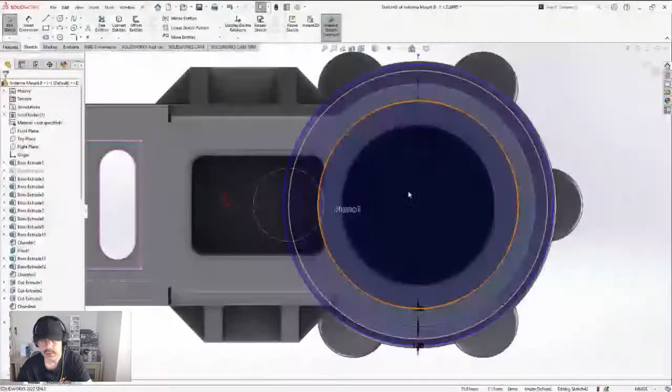Hey folks, getting set up here. It's been a long time since I've done a stream, so it's like going back to school for the first time, relearning everything.

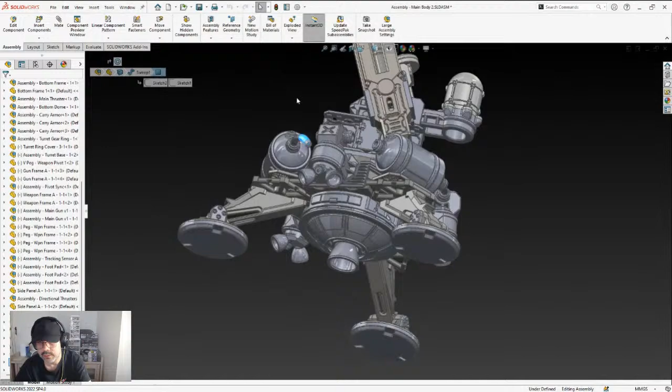The idea is this will be deployed from something like the VSS, my VSS in particular, the Space One, or some other craft, or it could be some sort of alien thing or whatever. The thing is that it gets deployed and lands on the surface.

So it has thrusters for maneuvering. I'm not sure what some of this equipment is, it's just that things look better with it. So some of this equipment is for balance, maybe this is fuel or some sort of energy thing. I don't know, but anyway, there's a lot of aesthetics here.

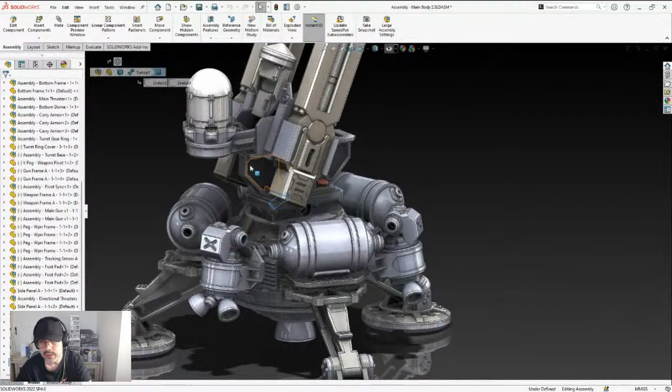A lot of it has practical aspects in the design, and instead of putting things inside, like fuel tanks or ammo drums, the idea was to put it outside. The reason is for logistics - if it's some sort of ammo drum, when the ammo is depleted it's going to need a new way to add more ammo. If it's some sort of energy cells, I don't know, might be just... anyway, I think I'm going off on a tangent there on a sci-fi thing.

So these cylinders, make it whatever you want. So anyway, this is the weapon that I'm currently working on. I did an alteration yesterday, I need to add it into this.

The idea is that it gets deployed as a sentinel, ideally with other similar weapons, perhaps other platforms with the same kind of weapon or different weapons, and they get linked to some sort of orbital satellite, with a special one used as a communications hub. So the idea is an entire system for planetary deployment.

You can deploy these things over asteroids or somewhere else. I still have to work on some other designs, purely satellite, where instead of the landing pads, I'm not sure what will be placed there for balance, but another weapon system could be placed on the bottom. So you have this turret that can fire 360 degrees in every direction using two turrets.

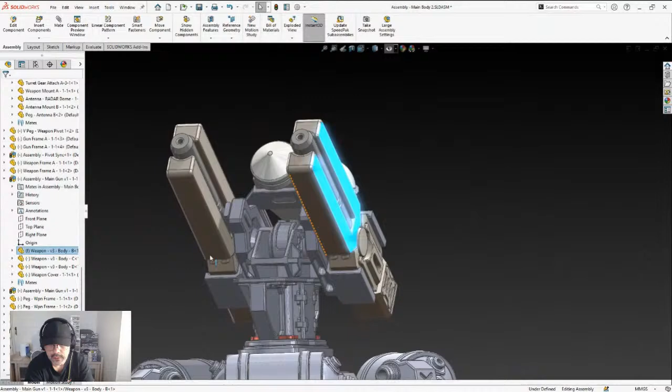I was thinking of printing a bunch of these while I'm here in Thailand. Then when I get back to the US in a few weeks, I could probably put those items that I printed and take with me, put them up on the store for immediate sale.

So what I'm doing here is looking at this area, trying to see if there's going to be a collision with anything there. I don't think so. I think it's got good enough clearance.

I did add a piece yesterday to here, I better add that in right now, mostly because I want to see how the thing is going to pivot and turn if there's not going to be any interference. Let me see.

Let me take a look at my files. Scrolling down, I'll take a look at comments a little while. I know there's people curious about Die Warriors, the current state of Die Warriors right now, and our future plans. So I do want to take some time to answer those things if people are curious.

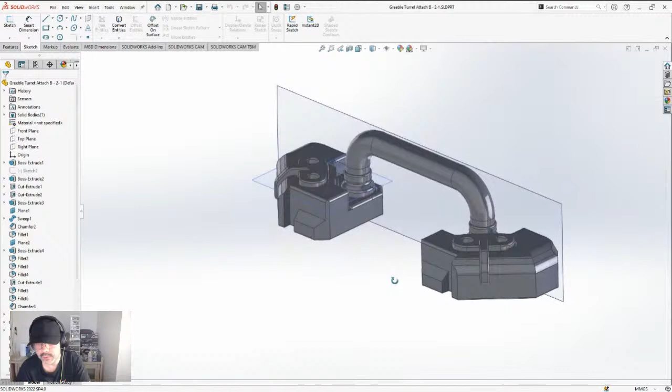So I'm using SolidWorks, and it's a fantastic CAD program, similar to Fusion 360 if you're familiar with that.

So I don't want to make anything right now. I want to insert this. I want to insert two of these, 1 and 2.

So sometime today in this condo, they have scheduled a fire alarm test. I don't know when that's going to be. So if there's some craziness that happens during the stream, you know why.

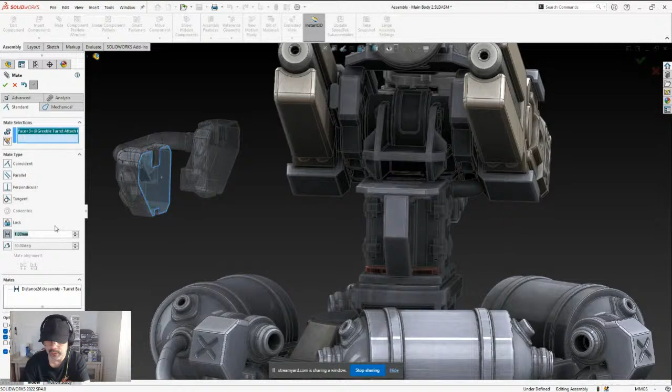If you're curious why I do that there, it's because I noticed with 3D prints there's always a type of shrinkage that goes on with the material. So I find that if I put a little separation between the pieces, they fit properly in the actual physical print. That's why I put a little distance with everything. That's what I'm doing here, so that's why it takes a little bit of time to show.

And here to here, 0.5. Yeah, that's it. So this side is done.

I may have to remove this bar right here, this pipe. When I designed it, I wasn't thinking about that, so that might present a problem. I have these ports for adding hoses and things like that, and maybe what I'll do is cover them up with a thin layer of plastic, and if I ever need to open them up, a small drill can just puncture that plastic and I can put a hose there. Might do something like that.

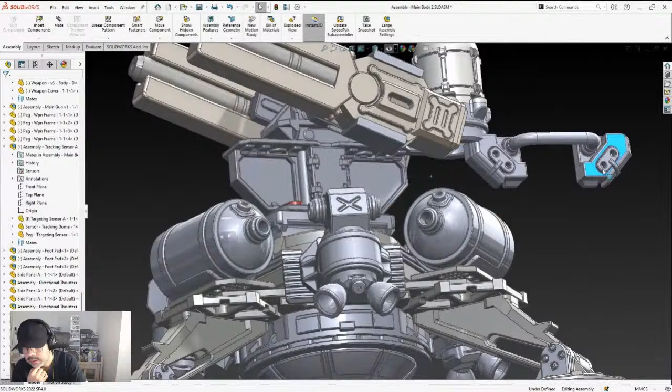I need to do the other one, the other side as well. So let's go down like that.

So right now it is Monday here in Thailand.

Okay, let's see, make sure it's down. Select that side and mate it to this side here at 0.25 distance.

So yeah, I'm preparing for a print. I got the printer currently printing a part right now, and I was going to have another part, actually the top part, this weapon area. I was working on printing that, but unfortunately...

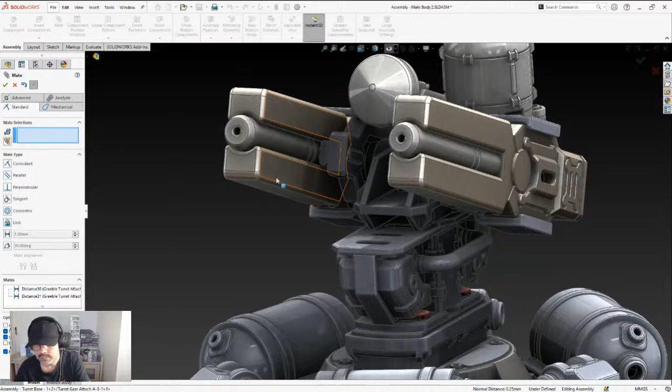I noticed that with this print, the prints are sticking extremely well to the printer, so when I pull the parts off, it's not coming off too easily. And I don't want to damage it. It's one of these flexible build plates, so I kind of bend it a little to flex it and push the things off. But I notice if the part is sticking too much and you're busy ripping it off the build plate, it could kink the build plate material, and then you have this little kink that's going to make a little rise in that area, and that's going to cause problems down the line. So I'm trying to preserve the build plate by having the thing easily come off, and one way to do that is not to have as much surface contact from the part on the build plate.

So what I'm doing right now is this area. This is what I'm going to be printing. This is an assembly, so I'm printing this as a separate part. I'll just go through. This is already printed, so I'm not printing that right now. I am printing this. I'm also printing that part right here in blue, the radar dome, at the same time, and then the peg that joins everything together.

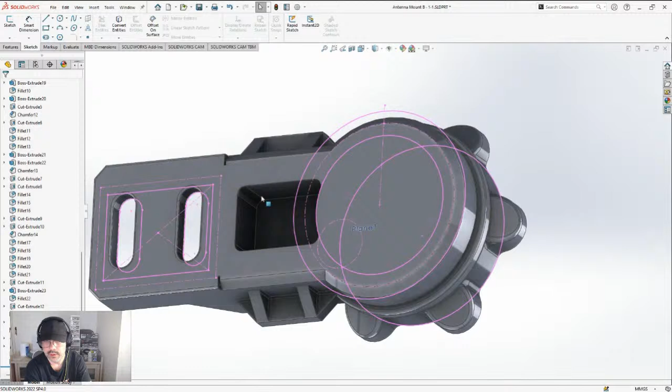So this is basically the bottom of the structure of the object, and this would be in contact with the build plate. It's a lot of surface area, so that's going to be a lot of resistance when I pull the thing off.

So to minimize that a bit is to reduce some of the surface area. Instead of making this cut very shallow, example, instead of having it like 0.25, this would work.

Let me just undo that. I don't think I was paying attention. Control Z. Okay, offset - that's what I wasn't paying attention to as I was doing this.

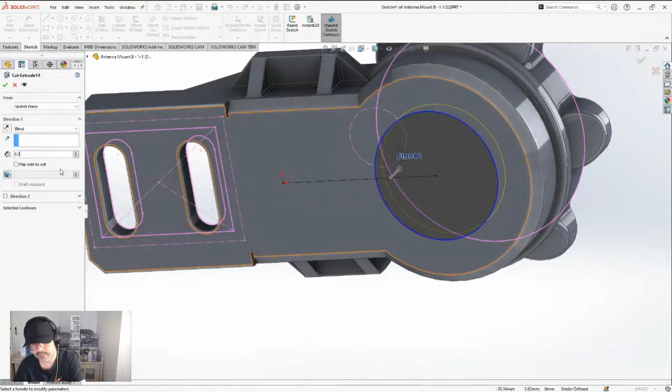So if I say a straight cut of just a quarter of a millimeter, that's enough on a filament printer to barely come in contact with the structure, with the build plate. So something like this is in contact with the build plate, but this is not.

And that means that gravity is going to warp this surface a little bit. It's going to bulge down just a little bit. Because it's only a quarter of a millimeter, it's going to bulge a very small amount, then it's going to come in contact with the build plate, but it's not going to be a tight contact. So it will have a little bit of contact, but not a whole lot, so there won't be a whole lot of friction on this particular area.

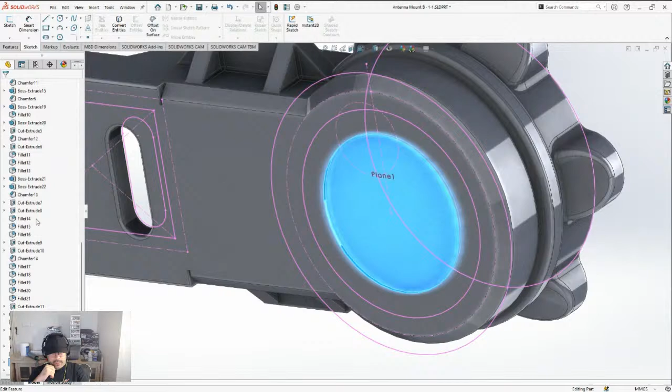But the thing is that for future design with this entire structure, I am thinking that I could always add a greeble or some other thing there if it was a deeper cut. So that's the reason why I am making this much deeper - an offset of 2 millimeters from the top, from this surface.

So you can see with this yellow line here, that is how deep it's going to go. From here, from the top to the yellow line, it's 2 millimeters. That's thick enough for a filament printer to print material.

And yeah, there will be gravity affecting this part here. As it pulls this down, it begins to make a bulge going down. The print will be kind of sloppy, but it's underneath - no one's going to see it unless they look underneath. And if I add a greeble to this, it'll completely hide it.

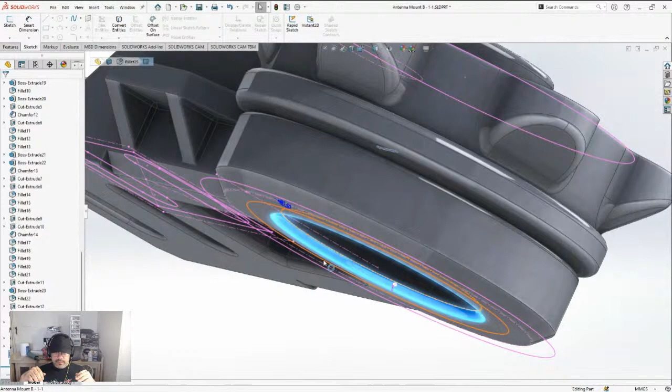So let me go ahead and unsuppress the other one - it's the same idea. Some fillets on the edges, which is always easier on a printer. Instead of having a sharp corner or a sharp edge, if you kind of fillet the thing or do some sort of taper, it's a little bit easier - two things: easier to put something like a knife to lift the part off the build plate, and it makes the area of the print around that area look cleaner as well.

Sometimes on a printer, it'll do shortcuts. It'll take the nozzle and go from one point to the other, going right across that open space, and then you get this stringing around it. So sometimes doing a little fillet like this will clean that up.

Now I'm going to go ahead and do another fillet inside here. But actually, let me go ahead and finish this part off - I was making some beautification. Let's see, from here to here it's about

3.5 millimeters. All I want to do here is make a little cut, something that I can put a knife or a screwdriver into, to help me separate the part from the build plate. This is mostly for other printers that we use in Die Warriors - some of them don't have a flexible build plate, so I need a way to put something underneath the model and kind of wedge it to separate it.

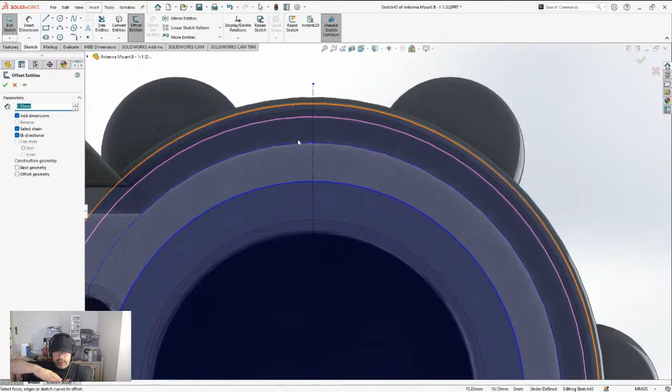So one way is to put little access points, so I'll do that right here. This will be enough - be 4 millimeters. I can make this smaller, but let's try 4 millimeters for now. I'll say okay, then I'm going to go ahead and trim these areas.

Trim all of this, because all I want here is just this. I want to also add a little fillet into this area so it's a little bit easier on the print. Let's say 0.75 radius, right there.

Now I want to go ahead and make a little array. I want to use the center point to be right here. So it's going to make an array of 4.

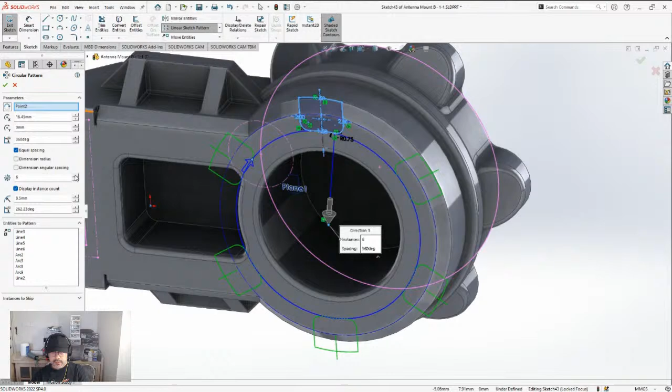I'm going to see how it looks if I do more. I'm going to get rid of these on the left, keep these here. Would it look good if I just - what if it's just 5? No. What if it's 4? Or if I do 3? No, not 3. Okay, let's try

6 of these. Let's go ahead and make these into construction lines so they still exist, but they're not going to be doing anything - basically they're hidden.

Now I'm going to do a small little cut - extruded cut doesn't need to be deep. We're going to do about 1.25 millimeters. And so that's how it is there. I'm going to do a fillet around everything here, 0.25.

There, there, there, and here. Then I'm going to go ahead and also do fillets there, there, and there. I will also do at the edge, I guess it doesn't like that. Well, let me get rid of that then.

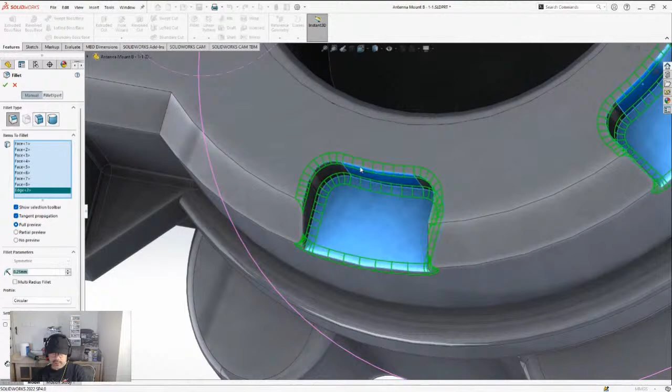Instead of doing this, yeah, so it doesn't like this area there. So let me go ahead and just leave it as is and see how that comes out. Okay, now I'm going to try again. Okay, there, this will work.

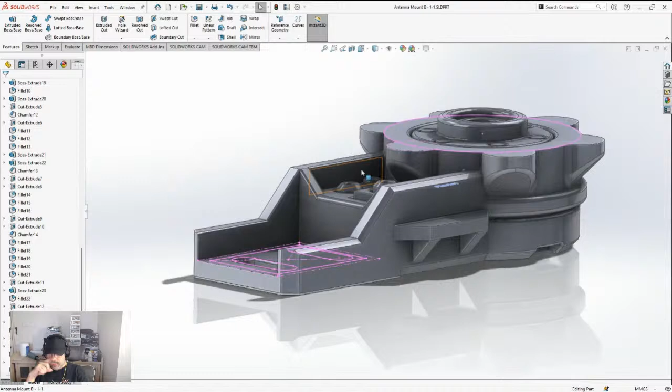Back in Florida, I have several of these already printed as prototypes. I like the way they came out, and they actually look pretty good. The weapon systems themselves are pretty much standalone, and I can apply that to other models. I do have a version of this as a 4-legged walker, so I'm going to try that at the same time as I'm doing this, but I'm not going to do a stream on that. That'll be later tonight or something.

Just work on that some more. I also have a version of it. Actually, let me show you. Let me get back to StreamYard. Let's see, I want to do this.

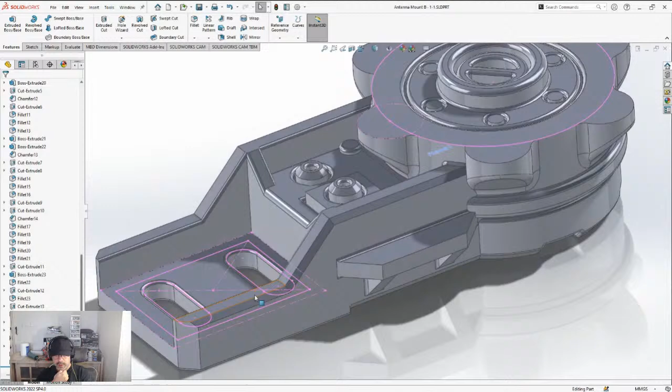So what you see done in Die Warriors, for the most part, these are original designs. And I have a lot of fun doing these particular designs, models, things that you see here.

I'm going to go ahead and suppress this. Actually, I'm not going to suppress any of these, I need these for future things. So ignore these pink lines right now, these are sketches that exist elsewhere, like that one exists there, this one exists there. Sometimes if I need to add more objects, instead of recreating the wheel and outlining these shapes again, I just keep these sketches present.

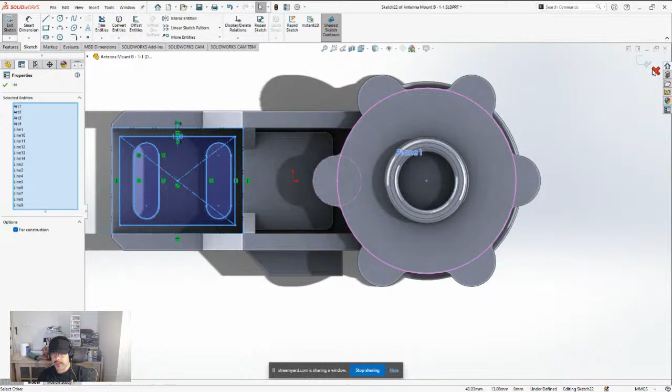So then I could just do something like edit sketch. Now I'm in edit sketch mode, and I could just take this, say copy, and then open a new part, say top plane, sketch this, and then paste, and then I can do what I need to do again with this, add to this particular sketch and make a completely new structure with it.

In this case, I might want to add like a greeble, so I can just make this into some sort of greeble. Anyway, I may do that, not at this time, but I may put some cylinders, maybe some ports to add hoses and other things like that, wiring basically.

Anyway, okay, back to this. So the next step that I need to do here is add some thicker fillets. Let's make this into 1 millimeter. I can make this into 1.5 millimeter radius. So it's quite big, but that's fine.

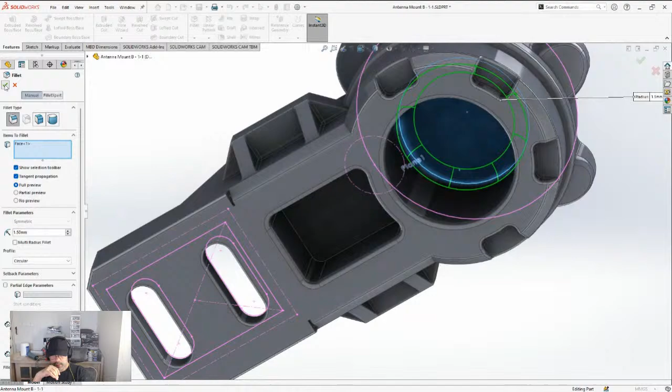And can I do the same here? Yeah, that's fine. Doing something like that will make the underside print fairly cleanly. You will have some messiness on the flat part here because it's an overhang, and it will be fighting gravity, and it just depends how fast the extruder is moving and how quickly the material is cooling.

So anyway, let's save this. Now I will make this into an STL. Save as. STL, antenna mount B, and call this STL. Yes, I wanted to overwrite.

Oh, how about that, the slicer is asking if I want to update that model now. Yeah, I say reload. Reload. Did it reload? No, it did not. Reload. Okay, well, I'm going to go ahead and remove the one that's already here.

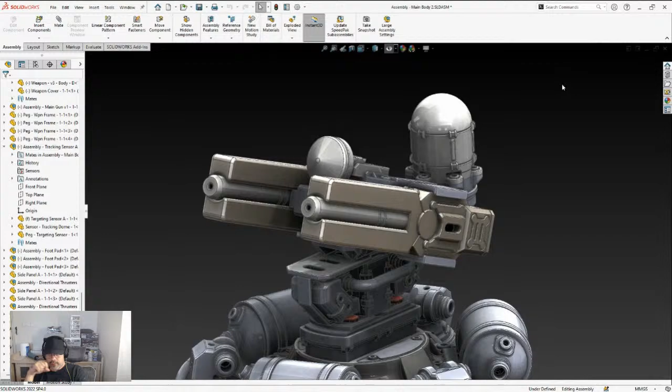Then I can close this slicer window and then get back to SolidWorks. Okay, yeah, so let's see, this is going to be the issue here. Well, the thing's not going to be able to shoot at that angle, so maybe there won't be an issue. Look at that, there is a little bit of clearance from the side, so I don't have to worry about that.

There is some collision right here. SolidWorks does have the ability to detect collisions. Oh, actually, there's no collision, sorry, no collision. How about, let me do a cutaway. Yeah, SolidWorks does have the ability to show me collisions.

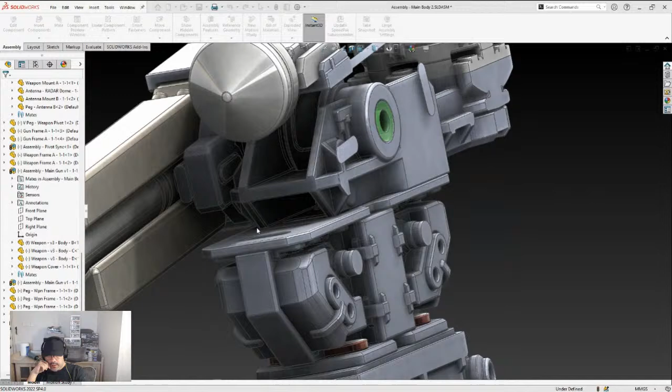I found that in an older version, I'm not quite sure where I would find it in this version. What's this? One or more components cannot be selected at the current selection pane. Just cancel it then, I don't want to mess with it. I want to show.

Well, it's doing something. Anyway, oh okay, it's back. Let's see, let me go ahead and save whatever it is I have. It's still doing something. Yeah, save all. Rebuild and save, okay.

Should I do the greebles at the same time? I mean, it's going to be printing that group of objects. What type of greeble would it be?

I could add some other sensor types of stuff underneath it, as long as I don't interfere with the objects in the back.

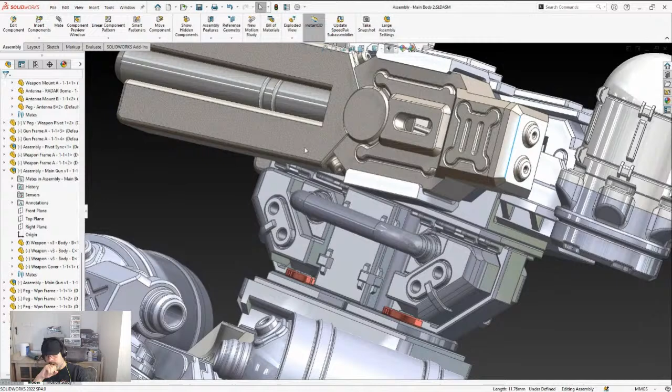Come on. Maybe I'll just close this, then I'll open it again.

Yeah, something is causing a slowdown. I don't know what's causing it. Yeah, go ahead and save it all. Save it all. Hmm.

Okay. Cool. Let me change the background.

Okay, so before I do the next print, which was the file I was just doing, I'm thinking what I can go ahead and do right now is make a little greeble. Let me reopen that file again.

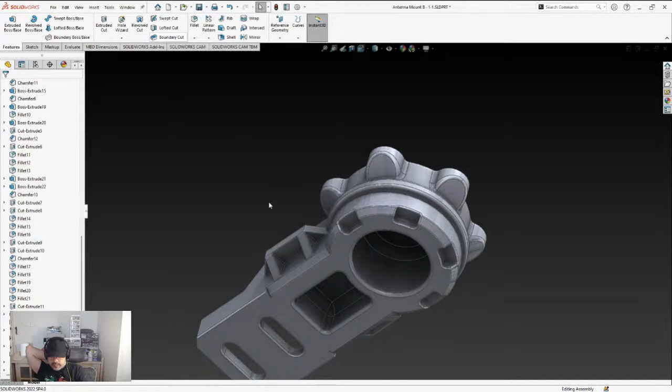So I'm looking at this and trying to see what's okay. There's nothing that's going to interfere if I put something in this area right here. And yeah, obviously there's not.

If I just have a simple little cover, I should probably make a simple little cover. I should probably make two simple little covers.

Okay, I'm making a little alteration. So right here, I am going to hide, suppress this fillet, suppress the next fillet.

So what I'm going to do here is go sketch, sketch, go offset. I'm going to remove bidirectional and do, let's see, 1 millimeter. No, let's do 0.5 millimeters. I just want a lip.

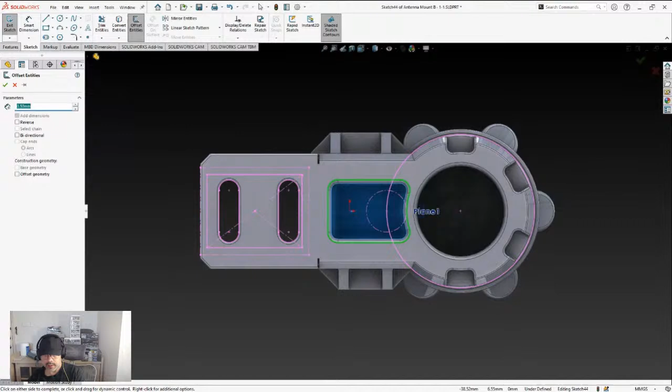Reverse, right about there. Actually, I don't need it to go so deep. Let me stop this and select that surface.

I hear some noise, like someone walking or something, but it's gone.

Okay, I'm going to go ahead and put a reference geometry right here, a plane. I'm going to have this plane offset 10 millimeters. I'm going to say 1.75 millimeters. So that's good right there for both.

Now I'm going to work with this plane and specify a sketch. I'm going to do the same thing you saw me do a few moments ago. Basically it's right there at that plane.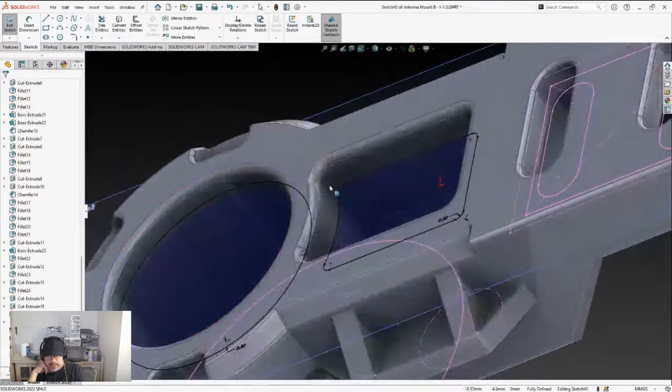So right now I have an outline there. I'm going to do the offset again, select chain, selects everything, and accept that. Do the same thing for this one.

So now I have, but I went the opposite direction. I got to do this one here again. Delete. So I select...

That surface there, and I say reverse. That's what I wanted. Now I select that again, go offset, is that 1.5? Okay, so now I have a little outline at that plane, which is 1.75 millimeters into the model.

Feature, extrude this, I want to go the other direction. 1.25, that's a good enough amount. I'll accept that. I want this to be some curves, 0.25, because this will work if it's even just 0.5.

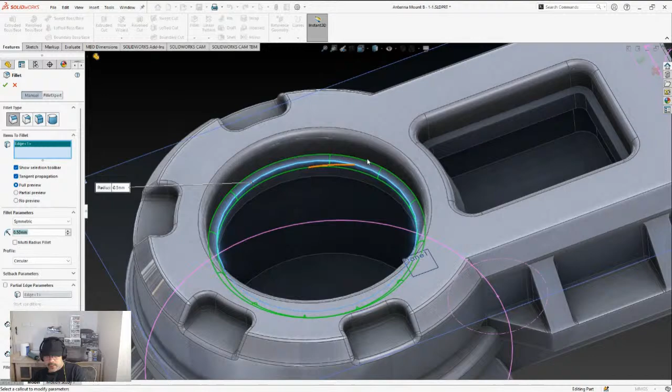So at 0.5, I have a fillet right there. I have a fillet right there. And that's enough of a barrier to stop the cover from going all the way in.

So I don't have to make a super deep cover. I could just make one that's just going to be about as deep as this. And you'll see it in just a bit.

So the customer, when they get this product and they're putting the cover in, they don't have to guess. It'll prevent them from accidentally pushing the cover all the way or too deeply in. And because this is filleted like this, when it prints...

It doesn't really have an overhang. Everything it prints is going to be supported by an adjacent piece of filament that's been extruded. So it's a self-supporting structure right there.

So let me go ahead and select this, do a cutaway. And I want to do the opposite direction. Oh, come on, there usually is an easy way to show the opposite direction. Right here, okay.

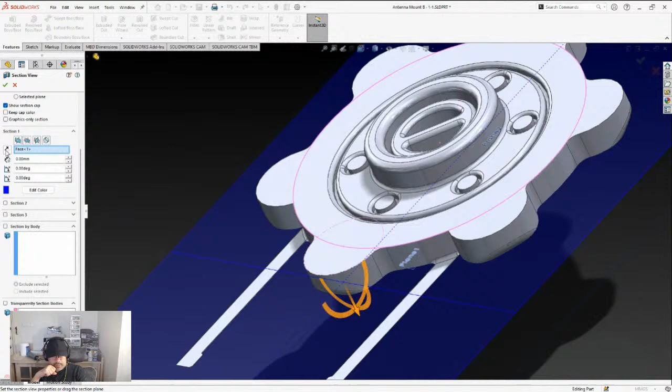And so now I'm at the other side of this. I am also going to do another fillet right there, so that way it looks a little bit neater.

And so now I'm going to do the cutaway again. I'm just going to go a little bit deeper, just enough to see the next one.

Okay, I can remove the cutaways. So now I have these are the lips here. Now I can go ahead and put back the two fillets that I suppressed.

Yeah, I know. Suppressed, yes, continue, we go to here. Come on.

I can get rid of this by moving it, I believe. Yeah, this next one, move it to here. Okay, and let's see. Okay, so that's all I wanted to do there.

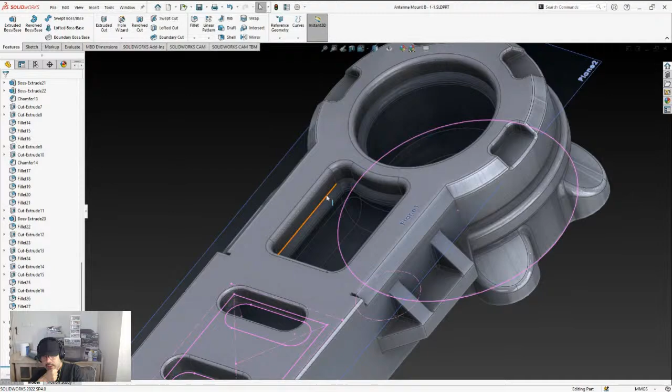I'm going to go ahead and just tell the thing to save, save project. I'm not going to save the project yet because I'm going to add the covers. And another reason why I'm not saving the project yet is because it wants me to enter in the path and all that. In other words, it didn't save the path and things from the previous or from when it opened. It's treating save as if it's a brand new file name and all that, like I'm going to put it into a different folder. Anyway, okay, so I have this.

Now I'm going to go ahead and copy the sketch that I did there. Now I'm going to go file, new part, and I'm going to go ahead and paste. I'm going to check comments to see if anyone has commented anything in just a moment. I'm going to go ahead and do the cylinder one first. So let me just go ahead and copy this into a separate file. Delete. File, new.

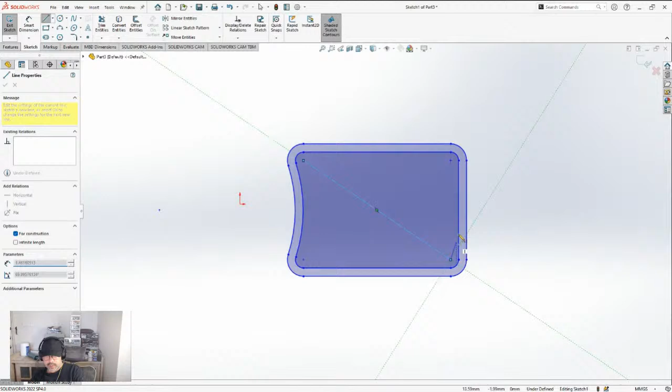Top, sketch. Zoom in, paste. And I'm going to tell the thing... there's a way to tell that you want this to be centered, but I'm doing it like this.

Okay, so now I'm going to switch over back to that. Okay, so I'm going to take a look to see if there's any comments. So many tabs. Okay. No comments there. Okay, no comments here. Hey, okay, cool.

Hey, Jose Sola, greetings from Thailand. Okay, very good.

Look, now I have Facebook opened up with a little thumbnail with the video. Now I'm hearing an echo. Okay, there it goes. Let me get back to my wall here. Okay, good, very, very good. Okay.

I should probably... oh yeah, so on other topics, I'm working on this particular model that you see here, and I go ahead and write a blog in the Die Warrior store, just basically talking about it because this is part of the Die Warriors conspiracy theme, and part of that is, well, it's part of an action figure theme that's being worked on. But since we also do our own props and models and vehicles and such, we have other things that are not action figures at all that we're working on.

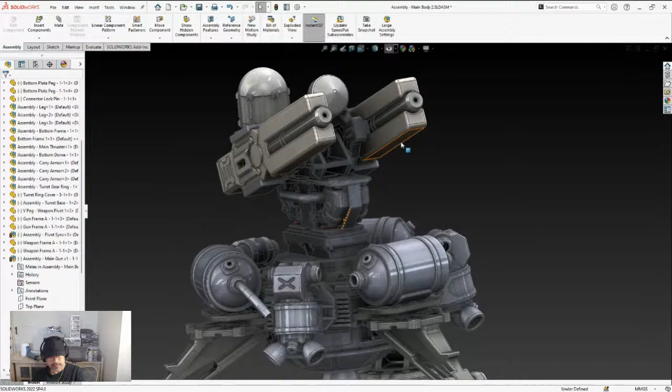All this is, it's an article of product that we own. It's a legitimate model toy. It's not a real planetary assault. So it probably detected the word assault, and they assumed the worst.

So I went ahead and in the Die Warriors store made a quick link at the top of the page that links to the article, and towards the bottom, right next to the area that talks about the latest news and things from Die Warriors, I made a little accordion, just one pull-down menu. The idea is that in the future, if there's more of these articles or links that Facebook decides to flag and remove, I'll collect all of these controversial, forbidden things into an easy to see list so people could go in and see the article. And there's nothing controversial about it other than the word assault, I think.

It's all fiction. It's about deploying this over some other world, some planet or an asteroid, as an autonomous defense system. So, anyway, back to the real world.

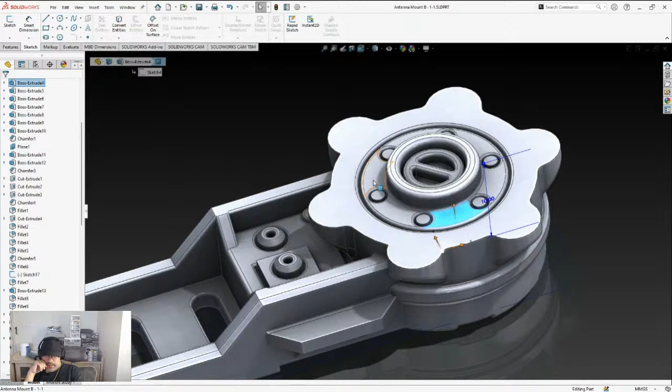Okay, so this is the outer diameter, and I'm going to reduce it with an offset by 0.125, so this is half of a quarter of a millimeter. I'm going to ignore this outline here and move it in some. Yeah, like this. And this is the inner wall.

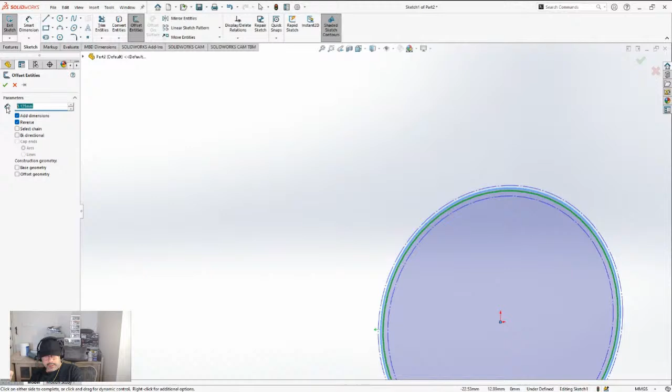I'm going to expand that. Actually, I am not going to do anything with it. I'm just going to make this into a construction line, and make this outer line here. I'm going to make another one at, what's it good, 1.5 - yeah, 1.5 thickness would be good right there. I'm going to go ahead and extrude this.

Let's see, that little lip that we did on the previous model is 1.75, so let's make this one 1.5, so it'd be 1.5 deep. I'm going to go ahead and make, what do you call it, right here, 0.5.

Add a fillet - we'll add another fillet of 0.25. 2.5, and I'm going to do it right there. So this is going to be printed upside down.

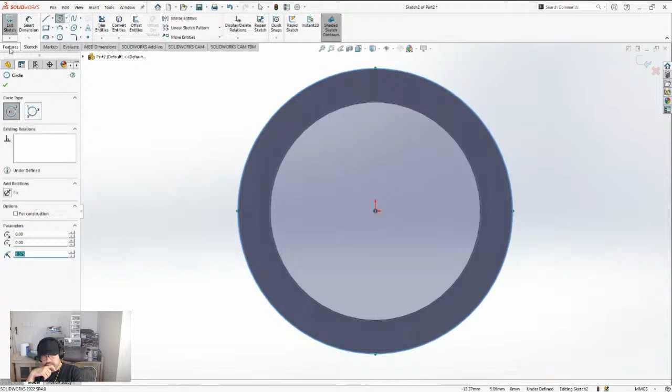It's going to be like this, so this is going to be the actual top. Right now, in the model, this is the bottom, but it will be printed where this is the top. So right here, I'm going to make another circle right there. I'm going to extrude it, actually extrude it the other way around, up to vertex - the vertex being up this right there. Well, no, it's not allowing me.

Okay, offset from the surface, that surface here, and I'm going to make it 0.25. Oh, scratch that. Because I... actually, yeah, go ahead and do that. I'm going to just change this there. There, yeah, okay, this is what I want.

So this will be a little bit of a hang right here. Although it is an overhang, I can fight against it by making it into a little dome, but that's only if I have enough material on the top.

Well, let me get back to this now. I'm going to do another - I know I could have done it as well. I'm going to do another right here, like this. Okay, let's see, I am curious about

what's the dimensions to this. Go to sketch. Okay, I'm just going to make it easy if I just copy it. Copy. What was the height? 2, okay.

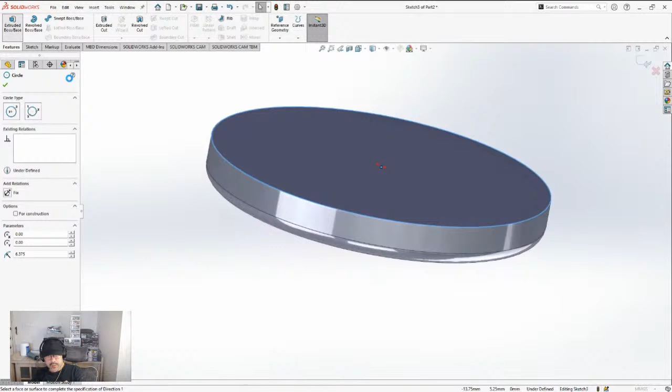So then let's make this one. I want this one to be a little bit taller here - let's say 0.5. Let's extrude it 0.5. That's what... 0.5. I'm just thinking of the aesthetics right now. Let's make this one chamfered at also 0.5.

Okay, and right here in the middle, let's do sketch, just paste this. Oh wow, it's almost as big. Okay, let's remove the chamfer - I think I'm going to use it now. Okay, let's make this 2.5 - I mean at two, the height of 2 millimeters.

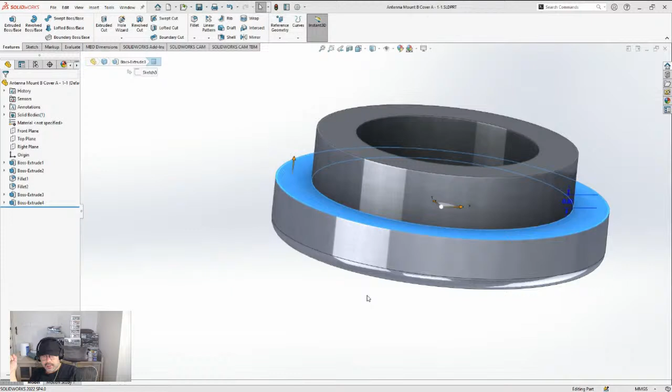Insert - so this is just going to be a quick, dirty assembly just to kind of see how this might be. About there. Yeah, it's good enough, I'll put it like that. It doesn't really have to be too flat, too much in there.

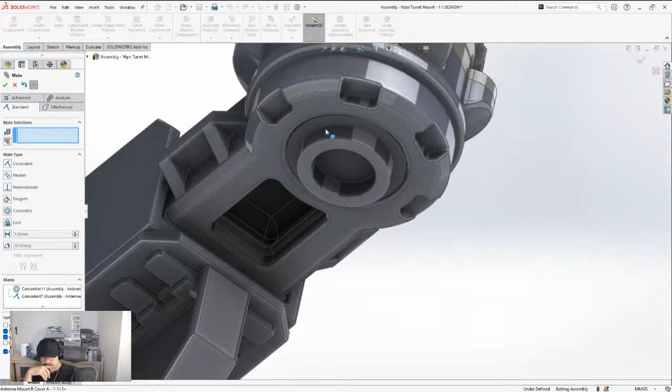Yeah, let's just try this for the aesthetics. Let me see how it looks on the bigger model. Save this.

Insert. Let's do it again right here. Mate here, concentric. We'll just make it flushed right here. Actually, this, to about there. Yeah, that's more like how it will really be.

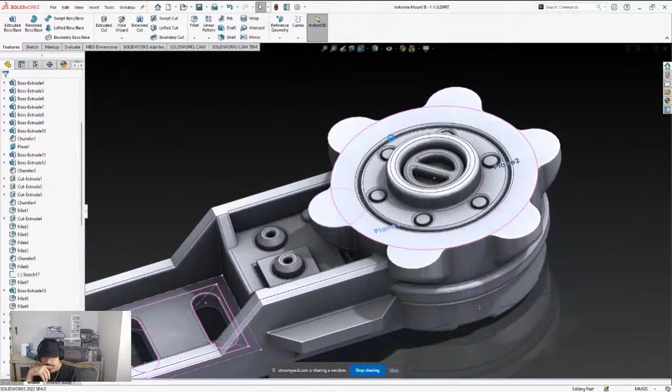I'm thinking. Okay, let's just go back to the top view here. Okay, so let's do this. Let's reproduce this. Copy.

And I'll check comments in just a bit. Height 1.25. Oh, this is very shallow. Okay.

So then here, paste this, select sketch, Control V, paste this, and extrude this 1.25.

Okay, good. Let me do 0.25 basically everywhere here. And let me also do a little cut.

See, here's what I'm thinking about. Close that. This is what I'm thinking about right here. I want to try, um...

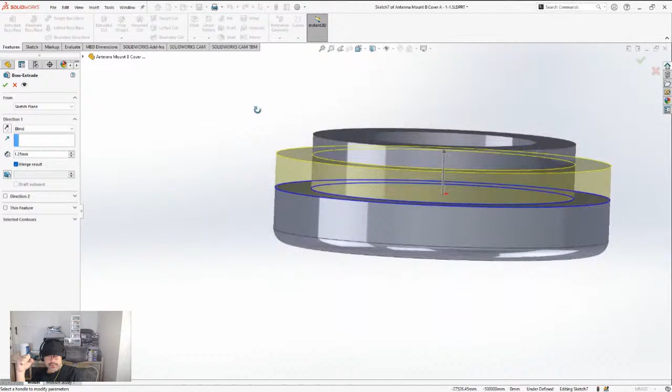Let's say offset from this surface. Yeah, let's try a 1 millimeter offset here. Why? Because I want to do this. Watch, at 1 millimeter right there.

Let's do 1.5. Makes it a little bit thicker here at 1.5, but let's try to see how that might look as a cover.

Yes, it is kind of thick, but does it look bad?

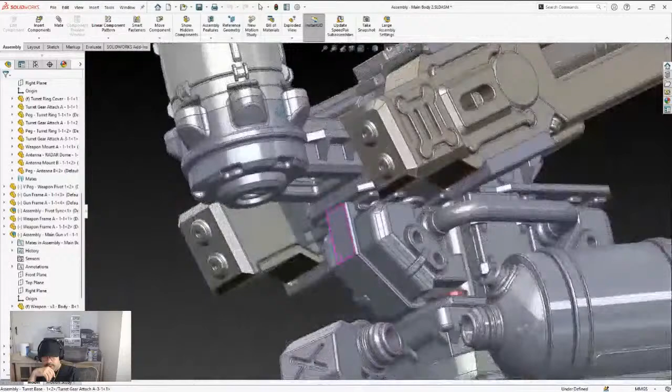Let's add some little details here, but let me check comments first.

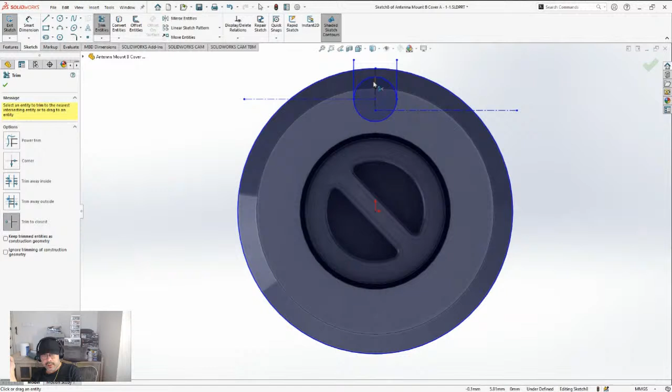Do this here. Trim, trim, trim, and trim. I can go ahead and remove these.

Okay, and I can go ahead and grab, don't have to grab everything, but I can just grab this. And come down to circular sketch pattern. Make this look like 5, yeah, 5 will be 5.

Do an extruded cut from here to here. Come on. One millimeter deep.

Let's add a fillet, 0.25.

Okay, well, let's add a fillet here. Actually, yeah, let's go ahead and make this one a deeper fillet. Let's say 0.5. 0.5, 0.5. Right there and right there too.

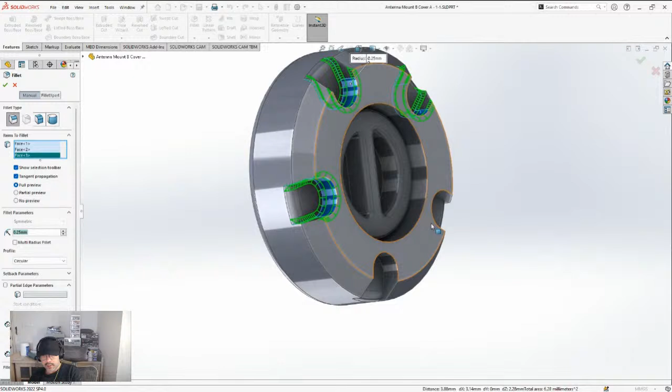0.25. Boom. Do that there. Do that there. Do that there. Do that there and do that there.

Yay, look at that. And let's do another 0.25 for that right there.

And just for right there. Yeah, that's it. A little bit of strength as it moves up.

One quick little look into this. Okay, nothing to see there. Okay, good.

So this is how it's going to look. Not too bad.

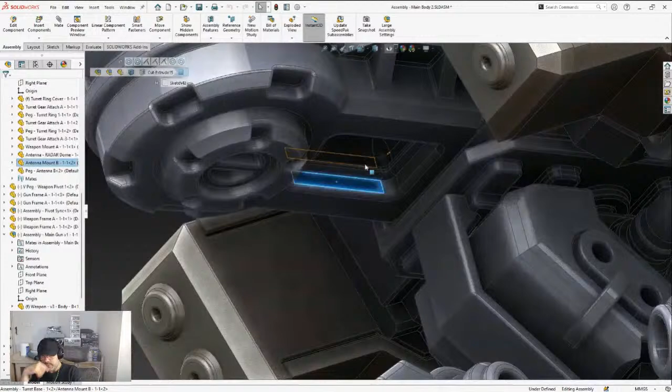Okay, now I'm just going to do another little cover. This is just going to be a plain thing right here, probably not much, although I'm thinking of maybe putting some ports for hoses to attach. We'll see, we'll see. Okay, I want to switch to this and save as STL.

Save. Okay, I'm going to switch to the slicer. Where is it? It's probably at the bottom. Okay, just added it to the slicer. I've just got to position it.

Okay, this is good enough. Let's just put it right next to the model it is intended for. Let's just put it on the other side right now. Rotate the slicer a bit.

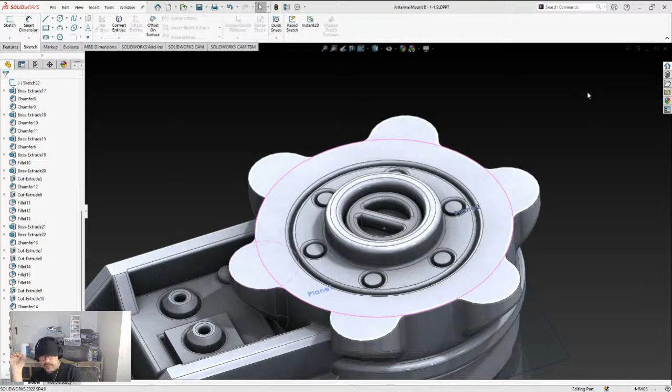Actually, it's not going to have a problem. Cancel, this is shallow enough. The walls are not thick enough, it's not going to have a very strong grip on the build plate. Okay, so I can leave that alone in the slicer. Switch over to the next model.

Do the same kind of idea. So I'm going to make... let's see, what is this? 0.5, right? Okay, good. So what I'll do is make an offset of 0.25.

Select chain. Okay, now I'm going to make this one 0.25. So I'm now going to make this one. I want to make it 1 millimeter, so I'll go plus 0.75. Okay, yeah, I lost the wall there, but that's fine.

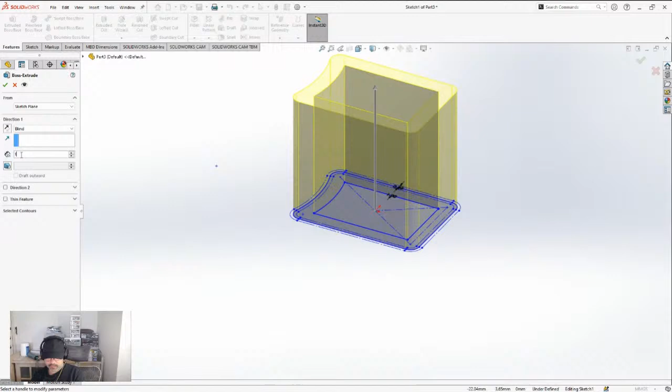Now I'm going to make an extrusion. We said it was 1.75, so I'm going to make this 1.25, 1.5. Do the same basic approach as the previous model. I'll make this one a little bit rounded here, one. It'll be a little bit easier on the print.

Now I'm going to go to sketch, do the same idea of making an offset. I could say 1 millimeter, that's fine. And then offset again, select the entire chain, go in the reverse direction. Okay, I am now going to go up. What will be a good height for this one?

Suddenly I close my eyes and I feel like, oh, this feels comfortable. Maybe I need to get longer sleep or something. I don't know. But anyways...

Let's make this one 0.5, half a millimeter taller. Let's do this a little bit different. Let's go ahead and make this one actually 1.5 millimeters taller.

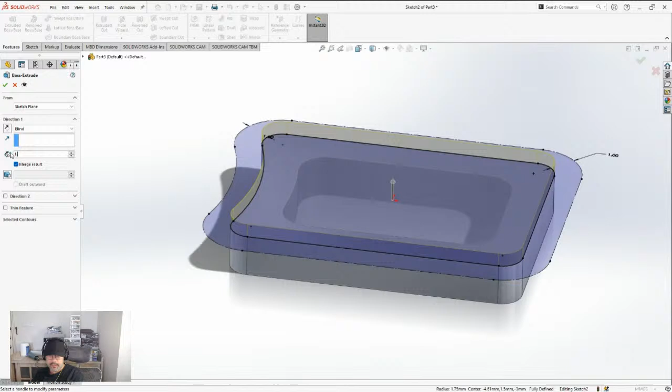And let's do it in an opposite direction, calling this one 0.5. Something like that. Yeah, that's good enough.

For the underside, okay, so here let's do this a little bit different. Let's go to sketch, do the same approach as before. Let's go offset, and then offset again. Let's change the offset to half a millimeter. Would that be... zero point 5. Let's try this.

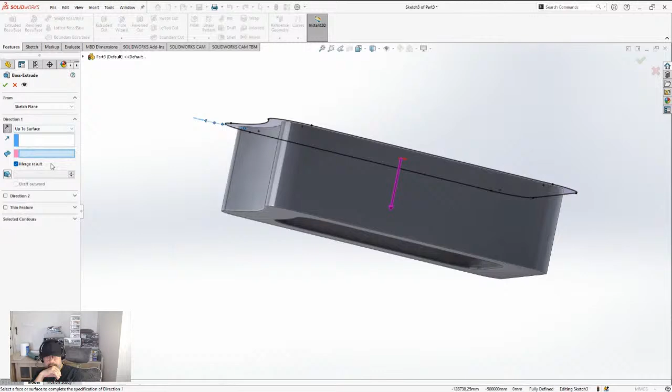See how this will work. I'm not going to do a second offset because I just want to go down a little bit, this direction. Let's say down at... let's say surface right here. Let's say offset from surface, 1.5. Okay.

Let's try this, for fun. Let's say fillet 0.5. Let's try 0.25. And let's do it like that. Let's just see how this is going to look.

And then let's do the top. Let's let the top be not a fillet, but a chamfer. Let's try 0.5 just to see what we got. Let's make it, this is all 45 degrees. We can make it more.

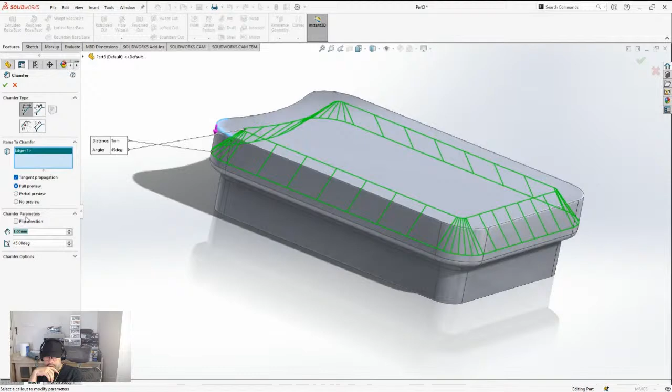No, 0.75. I don't know, let's try this. Let's just see what we get.

And let's go to sketch. I want to add 2 areas for attaching hoses. Let's make it outside towards here. So let's just say, maybe we don't want it completely in the center right there.

Hold on, I'm just thinking how might this bike look? I'm trying to make it look good, make it look interesting. I don't want to make it too predictable by having things always in the center, nice and neat. So let's say about here.

What's the size hose we're looking for? I don't know. 0.5, that's a radius, so it's a diameter of 1 millimeter. That sounds about right, sounds about good.

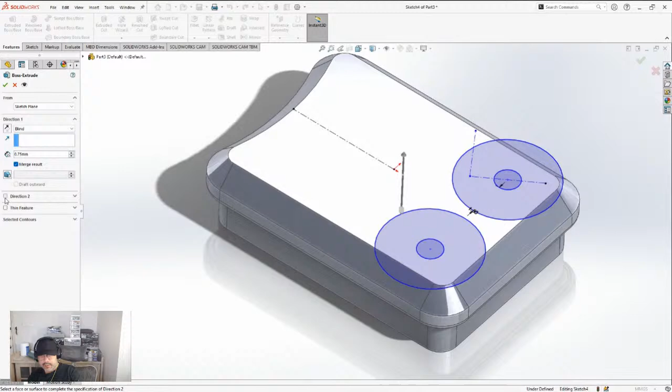Let's go ahead and copy this. Actually, let's mirror, not copy, but mirror to the other side. Features. Let's let the thing stick out a little bit, about 0.5 millimeter. Could be a little bit more, 0.75. And the other direction, let's just say up to vertex right there.

And then let's do a chamfer, chamfer of 0.5. Okay, and let's go ahead and do 0.25 fillets all around. Okay, something like this. Something like that.

And let's do it right here too. Right there, let's make that a little bit more noticeable. 0.5. Now, what do we do here?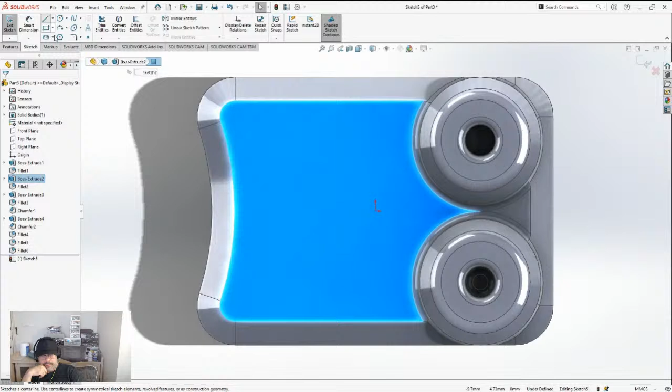Maybe some sort of vent. Let's say this is 3.5 length. This would be kind of a small thing. I want to make this 0.25.

Just thinking bidirectional. You can do end caps. Let's do... yeah, this is fine, 0. Okay, this is fine.

Let's take this and make a little array. Okay, it'll be just these. I'm going to copy this over. Mirror about there.

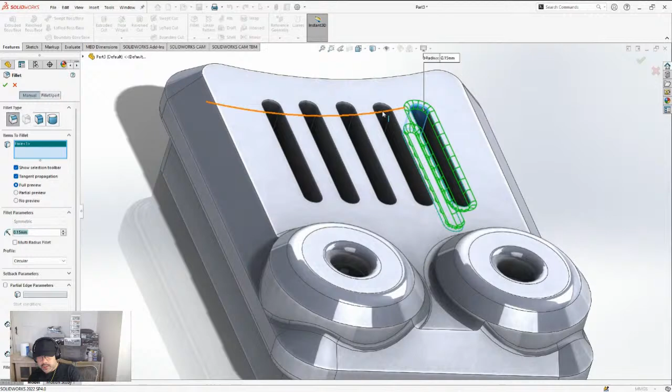Features and extrude cut. Yeah, you can see 0.75. That's good enough too. And let's make this 0. Let's just go a little bit smaller, 0.15, and do a fillet all around for this.

And I want to have another fillet, 0.5, let's say right here. Okay, let's just see how this looks. And then right here, a little fillet, 0.25. That's good enough.

Okay, save. Let's call this one like we did the other one. Where's the cover? B. Save. File, save as. STL. Paste.

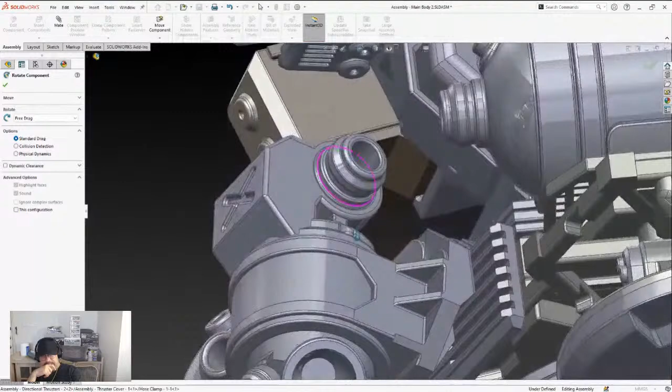Okay, I just want to see real fast how it's going to look here. Insert. Cover B. Rotate. Maybe I should have those hose pieces the opposite direction, like over here instead. But okay, well, let's just see how this works.

Make this here to here with a separation of 0.25. Yeah, right there. This.

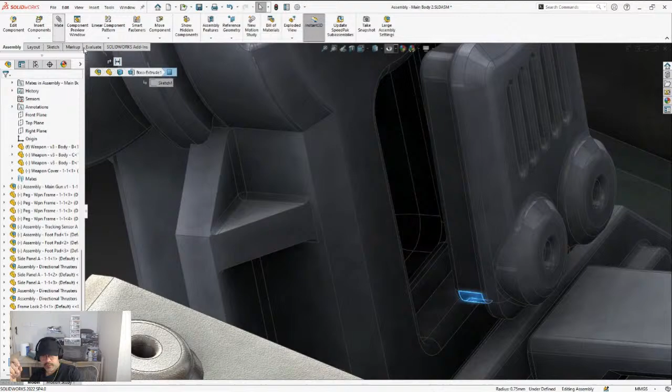Try concentric. Okay, well. Then let's do here. Try again here to here. Okay.

And then let's do here to here. Eh, I'm just going to remove this.

I know it's going to move around. I need to lock it in. So I would have it there though.

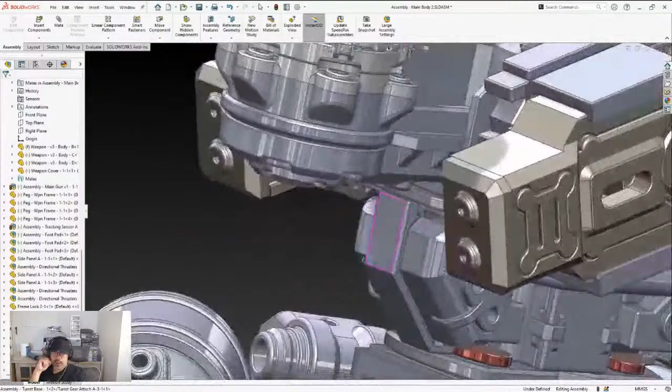Yeah, yeah, I think this is okay. Okay, so it's going to be something like this. I still need to lock down that mate there because when I move it, it's going to move around.

So I'll do that later. Mostly because I'm getting a little bit tired, and I think I'm going to get something to drink, probably a tea.

Okay, so this is what I'm working on right now. I'm going to get the print going with the STL. Oh, it's at the bottom of the thing right here. Okay.

Degrees, move it around. I want to move it to here. Okay, and now I'm going to go ahead and slice it.

I'm going to get the path just like I did previously. Copy. Copy that path. File, save project. Well, it kept the file name, it just didn't keep the path. Overwrite, yes.

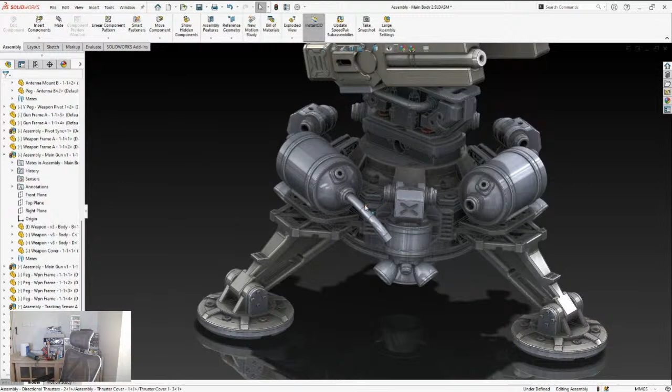Still coming, hold on. Just gotta put those things. Cold. Yeah, man, this is cold. Man, that's like the coldest refrigerator I've ever come across. Man, this is like ice cold. Yep.

Okay. Let's see, any comments before I continue? Let's see, go to check. What I need to do, I think, is get my other phone here and just have it as a dedicated second monitor just to keep track of comments or something when I do streams. I need to get into Facebook.

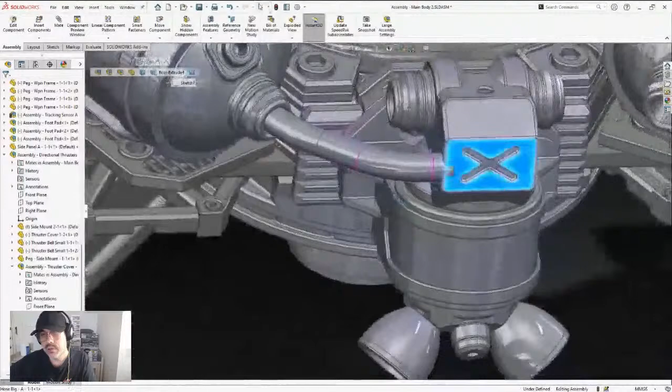I know SolidWorks can do it, but I don't know how to do it myself, so I'm going to look for some tutorials that show how and learn from that. At the same time, I'm also thinking, do I want it to be a hose like that? Do I want to do a printed hose that's hard plastic, or do I want to do it flexible?

I don't have the printer set up here to do flexible printing. So do I want to do a flexible hose using something like an A spring?

Let me see what StreamYard can show. Okay, let me switch over here real fast.

So an A spring is like this. They come in different diameters. These are small ones, I got other ones here, much bigger diameters. Mostly I got small ones here. I have them up to 4 millimeters thick. What I have here though are 3 millimeters.

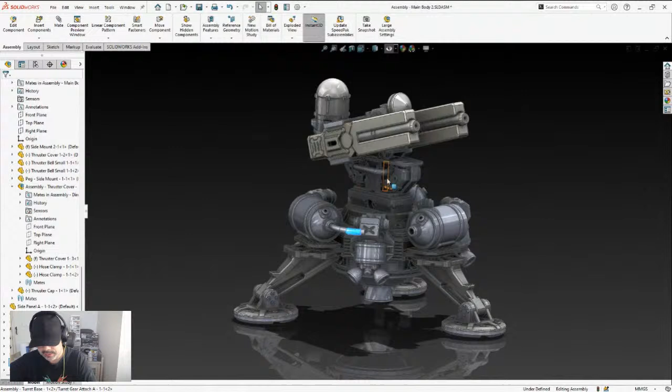There might be other attachments to attach, like some sort of wiring to it and things like that. Now, the idea is that this is a military piece of hardware, so I don't want to have too many hoses dangling and wires exposed. At the same time, I want the thing to look - I'm not saying alien, but I want it to look like...

...deployed, not forgotten, but left alone for - it could be months, it could be years, depending on the weathering conditions. The thing can get all dusty and covered with all kinds of alien soil all around it, like a Martian sandstorm or something. But the thing is still in a dormant stage, in a hibernation stage, and it's still keeping a little sensor monitoring going.

When something comes within range, it turns on a little bit more to do more monitoring and assesses the threat level. If there's no threat, it goes back to a lesser state of monitoring until that object has left the area, and then it goes into a hibernation state again. But it's just enough on to monitor in a very power-saving mode.

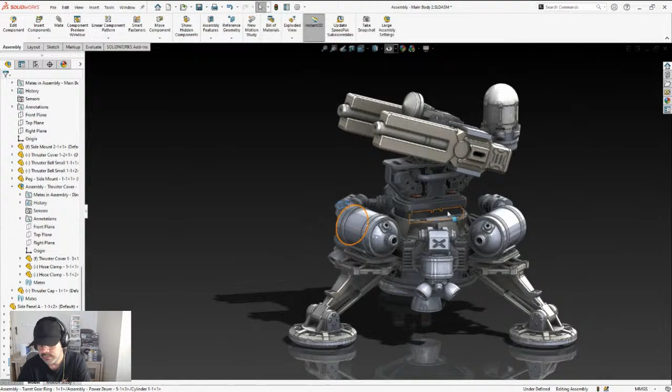Another thing I need to print is going to be these things here. I'm not quite sure how I want to do it. It just depends how I'm going to have these hoses attached. And that's the other thing too, I'm not quite sure. I'm kind of happy the way this looks right here, this item. I'm kind of happy the way that looks.

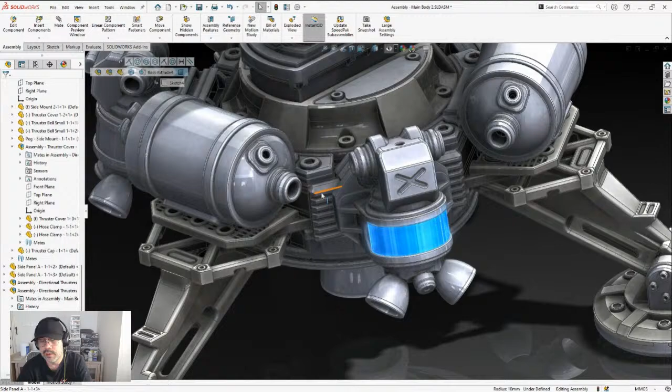Although for the hoses from this point, I probably will do another item that will attach to right here, and it probably will have hose attachment points that look like this, but further down there, and have the hose come out. I don't know, maybe smaller. The thing is, what I'm thinking is that if this was fuel, then I want to have an armored hose carrying that fuel to the RCS thrusters.

And I also then want to do a thruster bell like this, but for the top. Perhaps the thruster bell for the top could be mounted like right here, kind of sticking out, kind of sticking further out than those two down there. I'm not 100% sure. I'm also thinking maybe change the shape of that thruster bell to look more like fins, or perhaps just holes in the thrusters, or further inside. But anyway, mostly because I'm kind of concerned about how well these little thruster bells will print with this printer.

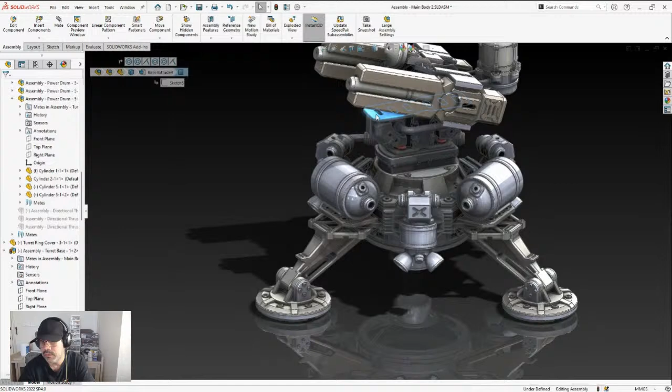Yeah, so those are my thoughts right now. Oh, other little things. So this is an autonomous unit, so humans are not required. However, I am thinking of attaching some sort of ladder in this area. It doesn't have to be on every landing pad, but it could. So a figure is going to be from the ground—the top of a figure's head will reach there. So it does need to have some sort of ladder kind of thing, something so a figure can step, at least some sort of stepping points, so the figure can step and reach to do maintenance. It doesn't have to be a full ladder, but it could be.

I could try something that extends from here and goes further up. Maybe I don't have it for every landing pad—maybe the other landing pads can have some sort of armored unit, some sort of armored piece. The other thought too is I'm thinking of extending the landing pad so it's further outward.

These struts, to make them longer, basically, or at least folded, like the way these kind of pivot. I was thinking maybe I could put another landing pad unit, and when the thing is being deployed, these struts are kind of folded in, and then when the thing lands, gets closer to landing, these struts extend by swinging out to right about here, and so these pads are further out in this area.

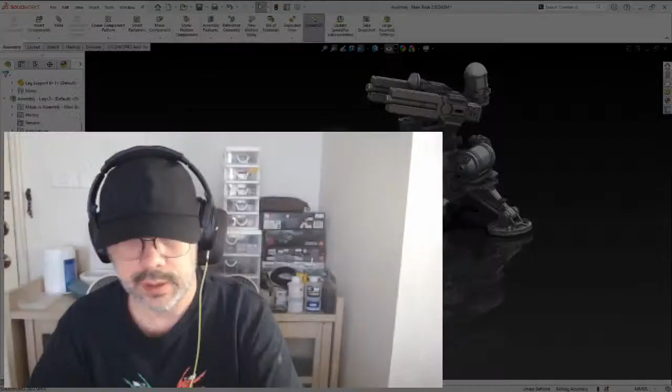So if I switch to the other window, maybe I can show it like this. So picture these struts here kind of extended out like that with the pad at the bottom. So when the thing is tucked in, being deployed, the pad is tucked in like this, but up here. So when the thing swings down, the pad just swings out. So it would be right about here. That's what I was thinking of.

I was also thinking of changing the shape of the landing pads into more like a foot, so more like a two-toed or three-toed, like the letter Y, just kind of stick it out like that. And so I was thinking of doing something like that.

So, anyways, this is the planetary assault platform. Maybe 'assault' in the platform name is probably not a good thing, but that's probably, unless I can come up with a better name, that's probably what it's going to be called.